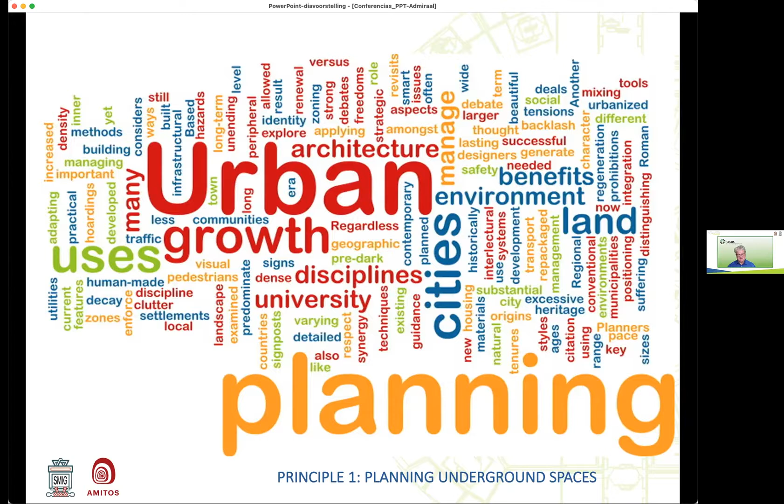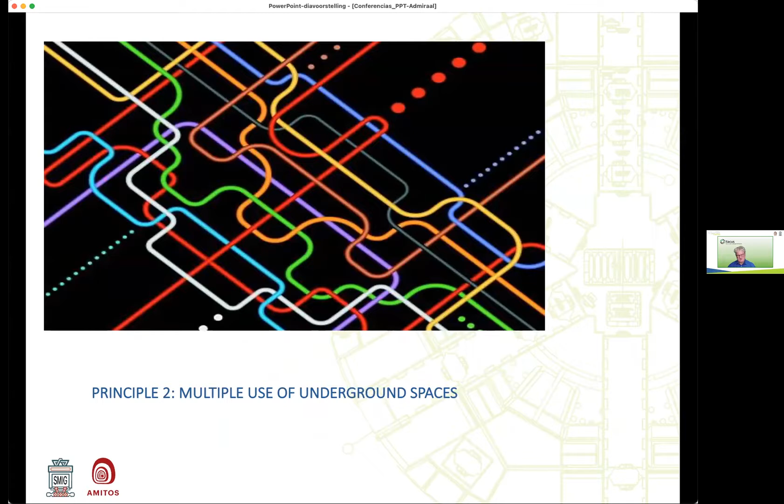I will go into this key principle a bit more in my presentation, and hope you will understand why we think this is a key principle, and something that is very necessary and needs to happen. The other principle is the multiple use of underground spaces. Again, something we will look into as we go through the presentation. A key principle: we have to stop using the underground for just one purpose. We have to start looking at how we can use our spaces for multiple purposes.

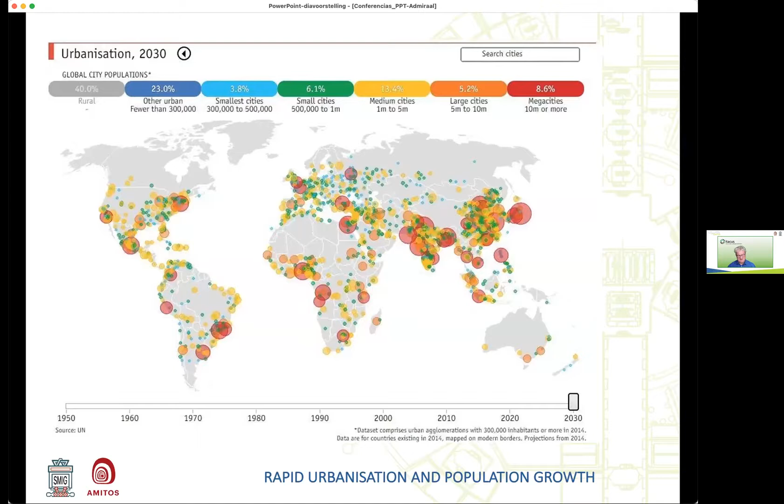But to begin with, let's look at the challenges that cities face nowadays. I don't think this map is a surprise to you all. It's a map that shows the rapid urbanization and the population growth that we have to cope with on our planet. These are the predictions for 2030, which is only 8 years away. Apart from the fact that about 60% of the world population will be living in cities by then, we can also see that 8.6% are predicted to be living in megacities, which are basically cities that house 10 million people or more inside their city limits.

Of course, another big challenge is climate change. I think we are all aware that the climate is changing. A lot of people are not quite aware of these questions of 1.5 degrees, 2 degrees. There's even a reference from the World Bank, which has determined that there's no certainty that humans could adapt to a 4-degree world. I always try to see these figures in relation to my own body temperature. I'm fine at the moment, but raise my body temperature by 2 degrees and I wouldn't be feeling all that fine. If I raise it by 4 degrees, I would feel very poorly indeed. And this is what we're looking at.

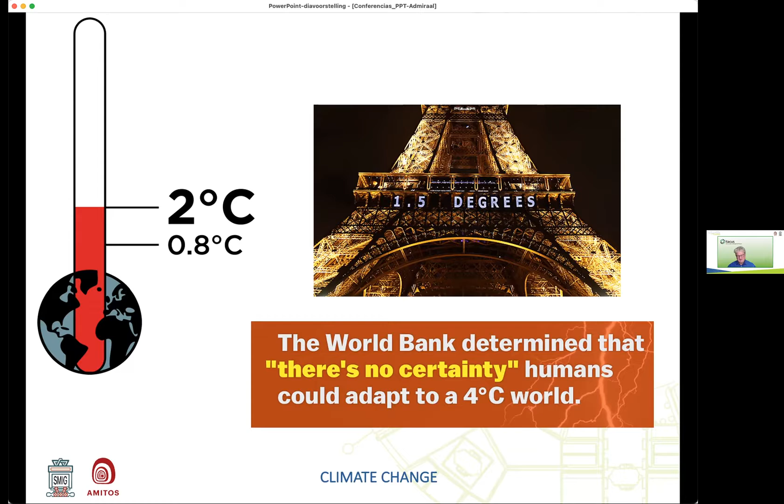This week, a report by the UN climate panel came out, which basically said we really have to start acting now. It's no longer time for discussions or research. We have to start acting now. Otherwise, we will move towards disastrous times. And of course, I think subsurface underground spaces have a large role to play in climate change as well.

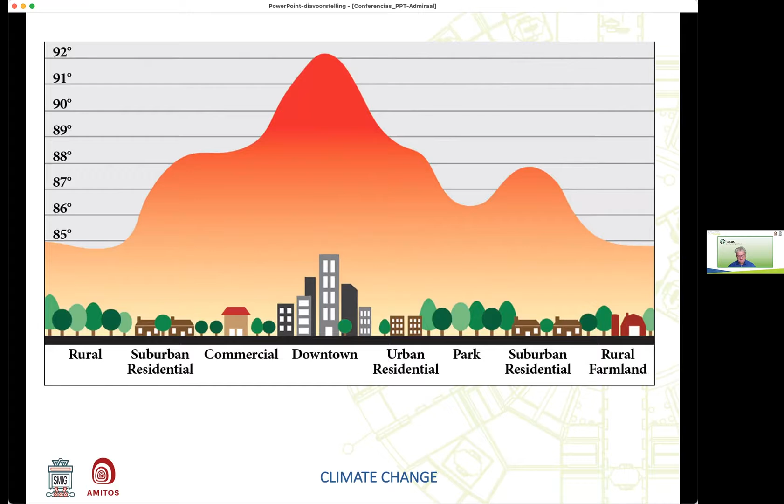We see an increase in climate-related disasters. We see an increase in floods, in storms, droughts, and of course, extreme temperatures. And especially the extreme temperatures are happening in places where they weren't expected, or they weren't taking place in the past, which basically means that a lot of cities are just not prepared for these temperatures, have not been designed to cope with these temperatures.

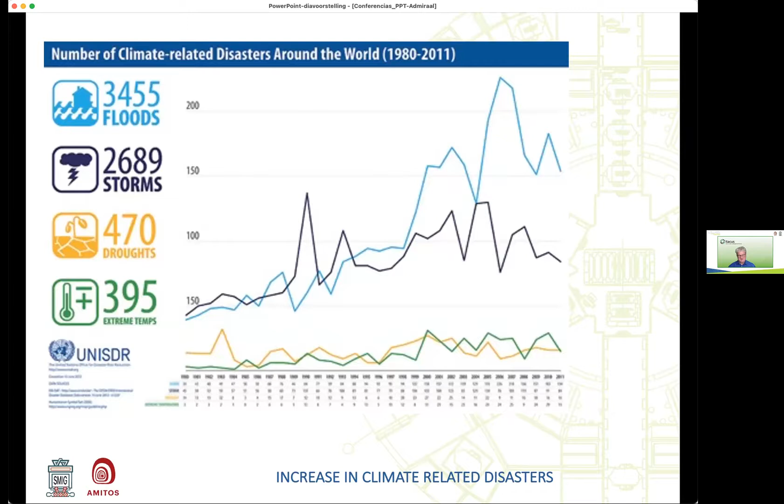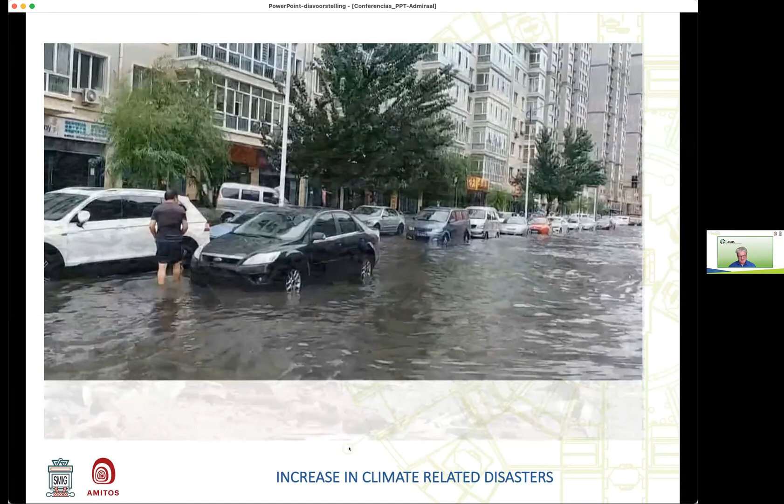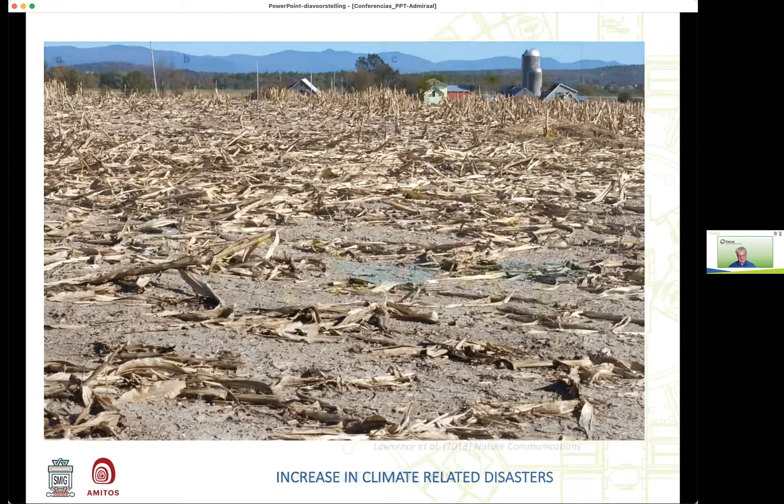The same holds true for drought, which is at the other end of the scale, where we have too little water. That is impacting crops and is leading to food shortages, as it impacts the total food supply chain. So climate change is not just about water, it is also about droughts. So we need to do something about this. We need to talk about climate mitigation.

And here you see a diagram from a recent paper in Nature Communications, which shows some of the strategies that are being looked at. Now, the strategy on the right-hand side of the diagram is called RFG. It's known as radiative forcing geoengineering, which is basically where we try to come up with technical solutions to kind of play down the effects that the sun's rays have on the raising of the temperatures on Earth. It's not something that I think underground space can help with.

But the two other solutions are a lot more interesting, where we talk about, for example, CCU, carbon capture and use, where we see the reuse of carbon, or CCS, where we have carbon capture and storage. And there's of course a combination of these where we actually capture the carbon emissions, we store them below the surface, and then we reuse them as part of the production processes.

We also have CDR, which is basically carbon dioxide removal, where we either have the strategy of reducing the carbon dioxide emissions by not using fossil fuels anymore, but also by storing them again or capturing them indeed. If you look at number 7 in the diagram, you'll see these units that are actually capturing directly. It's called direct air CO2 capture and storage, which goes with the abbreviation of DACCS.

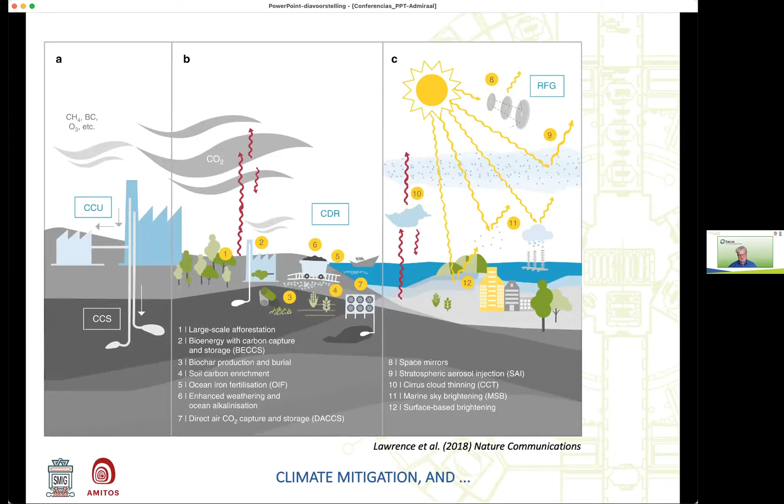But there's also agreement around the world that we need to look at climate adaptation at the same time. For a long time we thought that we could, through mitigation, delay the effects of climate change. We're now realizing that although we still need to do this mitigation, the effects of climate change are already here, and they're asking for schemes where we start to adapt to the fact that the climate is changing.

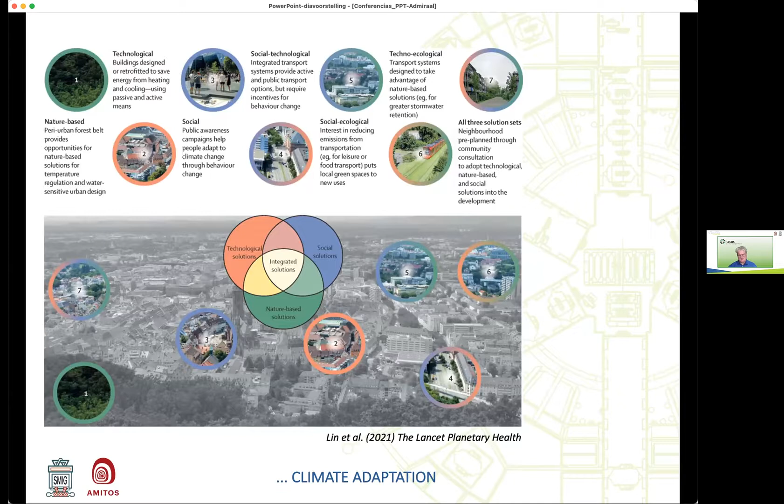And these call for technological solutions, they call for social solutions, they call for nature-based solutions, but overall they call for integrated solutions. And I think this is again of interest to us when we talk about the use of the subsurface, when we talk about creating underground spaces. We need to start looking at multiple use. We need to start looking at integrated solutions as well for that.

So those are the challenges that cities worldwide are facing. But we also need to look at the opportunities. What are the pathways forward, I've called them. And I think this is where we can start looking at how can we actually use the underground space. What are the pathways forward? And the first is what I would call audacity. We need to have the audacity to use our human ingenuity, and we need to start adapting.

And this is an example of the use of underground space, which goes back to thousands of years before the Common Era, where already in China, in certain areas, the yaodongs were created. And what are yaodongs? Well, basically, they are dwellings below the surface, and these dwellings have been built by humans who were adapting to the environment, who were adapting to the climate. And they started looking below the surface for protection from the climate. And they did it in a very interesting way.

They did it by basically creating these atriums. As you can see, the atriums are still open to the sky, to the outside environment, but they then lead to chambers that have been built into the rock. They go sideways into the rock to create additional spaces. And I always like to point out in this image that there are trees planted at the surface, but there are also trees planted in the courtyards that have been created. And this is a detail which we'll come back to later, which is, I think, very important. So keep the tree in mind. We'll come back to the tree later.

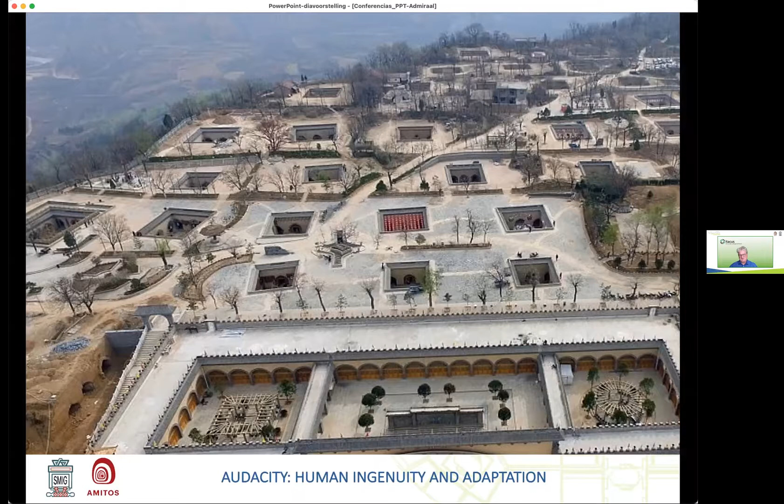But the point I'm trying to make here is that these kind of dwellings have been built for a long time, but they are basically the basis on which we design our underground facilities nowadays as well. And just to give you an example of that, we have the underground school extension that was built in Arnhem in the Netherlands. I won't go into too much why that was built, but basically the school needed to be extended. The original school was built by a renowned architect, and no other architect wanted to build something next to it that would compete with the original design.

That was one reason. And the other one was that the whole area where they wanted to develop this is an area of outstanding natural beauty that had to be protected. So they weren't allowing any surface buildings to be developed in that area anymore. So there were two reasons to go underground. And here you can see the inside of the facility. It's a school for music and dance. The classrooms are built into the side, as it were. You can see the rooftop, which allows daylight to enter, and you can see the steel structures that have been incorporated, and they are there to withstand the soil and water pressure of the underground facility, as it's built in an area with a very high water table.

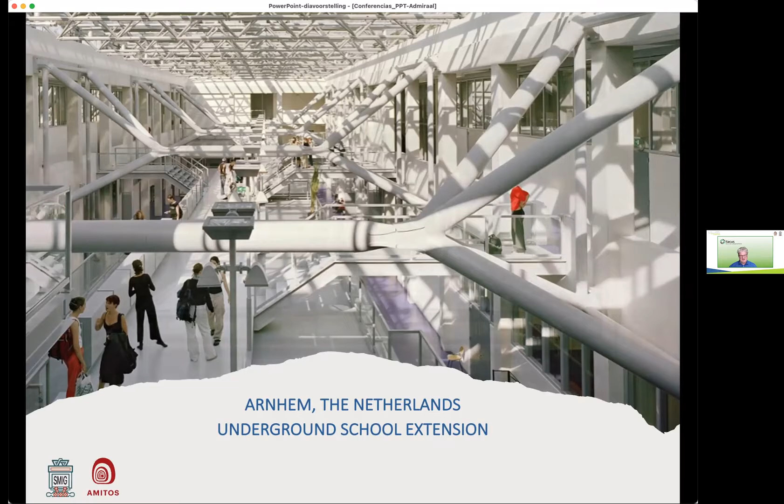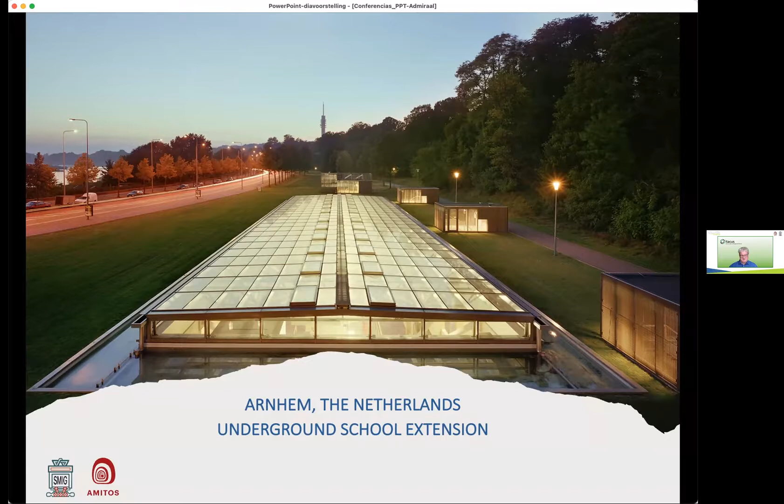And this is how it looks at the surface. You can see that what is actually the roof when you're on the inside is at grade. It's a skylight that you can see, but most people don't notice it when they pass by. But it's an elongated yaodong. It's the same principle as the yaodongs that we saw before.

And if you want to take this whole idea a little bit further, then you come to a project that was proposed by Dominique Perrault, French architect, in Seoul in South Korea. He calls it the light walk. The light walk creates at the surface a very interesting feature in this whole green area, this green public space that we find inside the city.

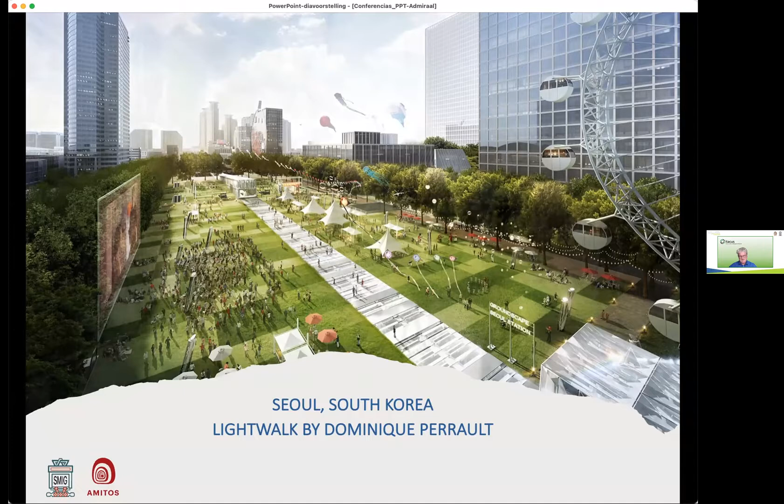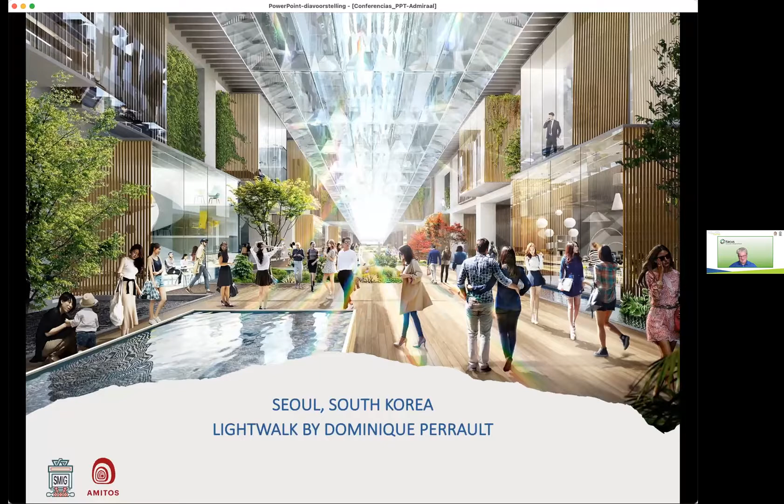We have daylight entering from the surface through the glass canopy that has been placed there. And you can actually see people walking at the surface using the light walk as you walk below. And what it does is it actually adds extra space to the city. It adds something to it; it's a new tissue that is being added to the existing urban tissue.

But we can go further than that. We can actually also create our own caverns. The caverns is typical for humans seeking shelter. It's been something that's been done since the advent of humans. Basically, they went for shelter inside mountains. We are now at a point where we have the technology to create spaces inside these mountains. We can excavate them. We can take out the material. That material can be reused as a building material, and we're left with a space that can be used in multiple ways.

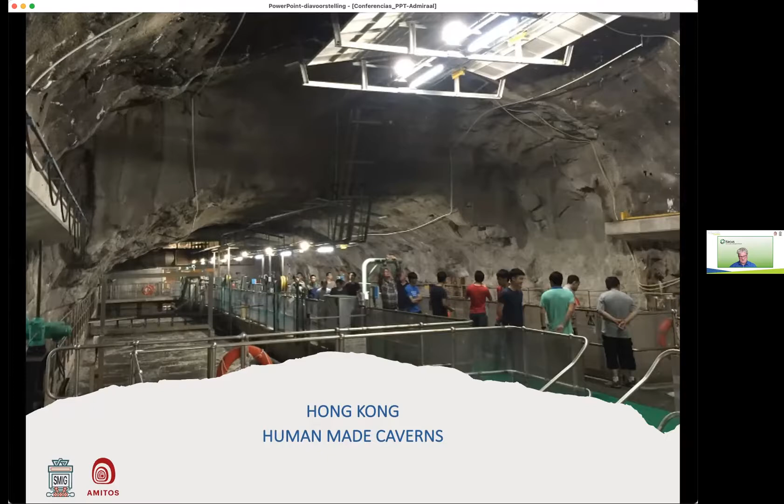And indeed, in Singapore and also in Hong Kong, they are looking into ways of reusing these caverns. Here, for example, a wastewater treatment facility has been placed into this space. And I think what is interesting here is that you have created a space that is now being used for a wastewater treatment facility, but it could be used for any other use at the same time. This was done to free up surface space, so that at the surface we create new areas where they can develop for housing by placing the wastewater treatment facilities that up to now were at the surface below the surface. So the opportunities are unlimited in this sense.

As we saw an example, you can use it for education facilities. You can think about cultural facilities. Museums are obviously facilities that would have advantages when placed below the surface. If you think about it, a lot of the museums that display art or old paintings don't even want sunlight to enter their exhibition spaces because the sunlight could actually damage the painting. So they don't even need daylight to exist. And indeed, if you look at the underground expansion of the Louvre in Paris as a good example, you'll understand what this means.

At the same time, we have transport and transportation hubs. You could start combining these things. You could combine culture, education, transport hubs, shopping malls into underground facilities. Industrial facilities are possible as well. I already mentioned the wastewater treatment facilities and geo-resources. And of course, the geo-resources is where we hit on what I talked a little bit about earlier: the fact that we can use the subsurface for energy purposes. We can use the subsurface for storing CO2. We can use the subsurface for extracting materials.

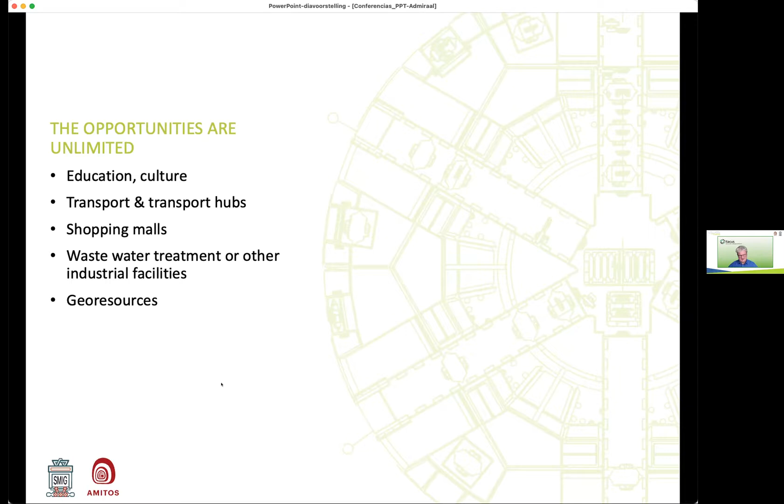But then we have to decide on how all these uses will come together, and that is what we will be looking at in a minute. Because planning, as I said earlier, is essential. It's what I would call key principle number one. And why is this important? Well, basically, we want to avoid what I would call urban confusion. So we need urban planning to determine what uses are placed where in the subsurface. It's about locality, but also about temporality, as we will see later on.

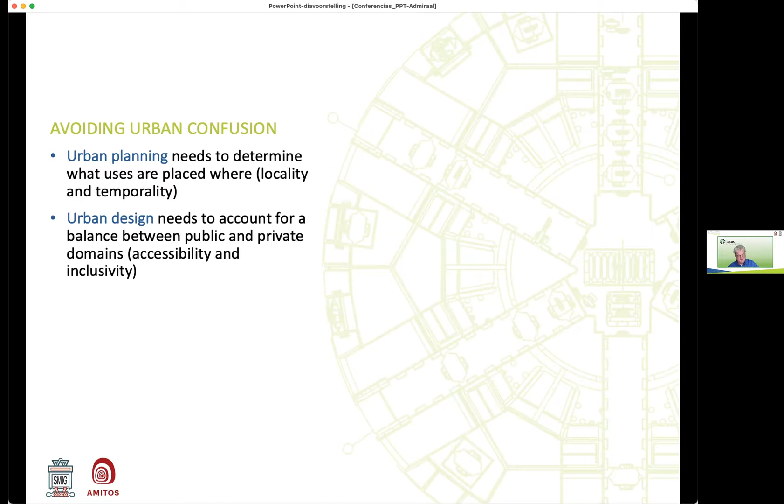Time plays a role as well when we're using the subsurface, and we need to think about what that means when you come to determine whether or not you're going to use the subsurface over a period of the next maybe 100 years. Urban design needs to account for a balance between the public and the private domains. We need to think about accessibility, and we need to think about inclusivity. And we'll go into these things now.

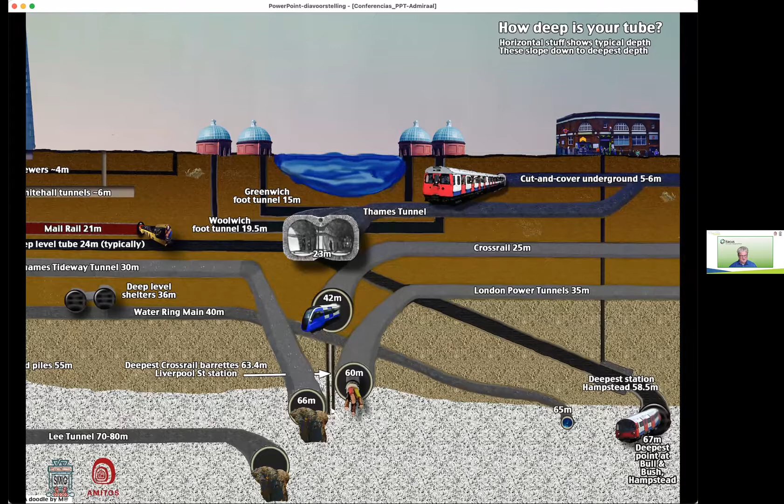We have sewers and the Whitehall tunnels at 4 and 6 meters depth. As we go through time, you can see that things are being placed deeper and deeper below the surface. The deepest station is Hampstead at 58.5 meters below the surface. But the new Crossrail, for example, is at 25 meters depth, but sometimes has to go to 42 meters to go under already existing networks.

labyrinths, or as a French architect coined them, he talked about the mangroves that were, as it were, below the surface. The mangroves, you can see nice greens above the surface, but the whole root structure that then extends below the surface actually determines the mangroves, and in this case all the underground roots, if you like, determine the city, because the city couldn't function without these underground facilities and underground networks.

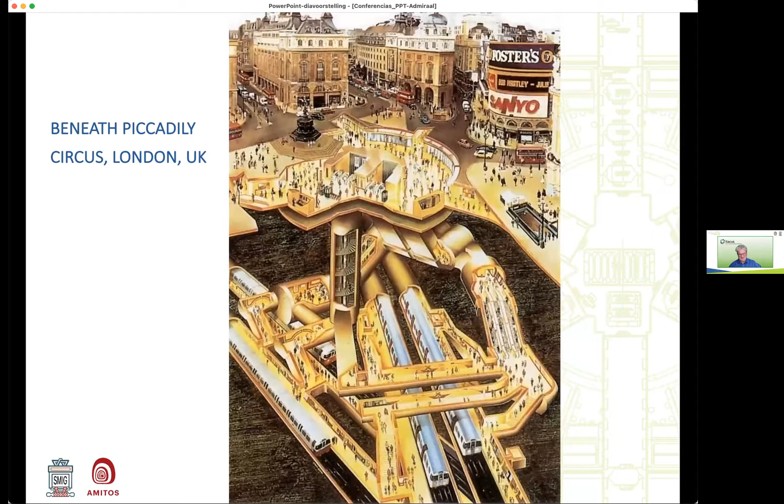At the same time, we need to avoid creating what I would call the urban service layer. We need to appreciate that the subsurface does not serve the city. It is not there to just place everything we don't want at the surface below the surface. The subsurface is an integral part of the city. It provides support to the city in the sense that it makes life in the city possible.

So its development should aim at integrating the new tissue that we are creating below the surface into the existing urban fabric. We should stop with creating these single purpose spaces that only connect through a staircase to the surface. We need to start thinking bigger in that sense. So we need to move from creating an urban service layer towards an underground urbanism.

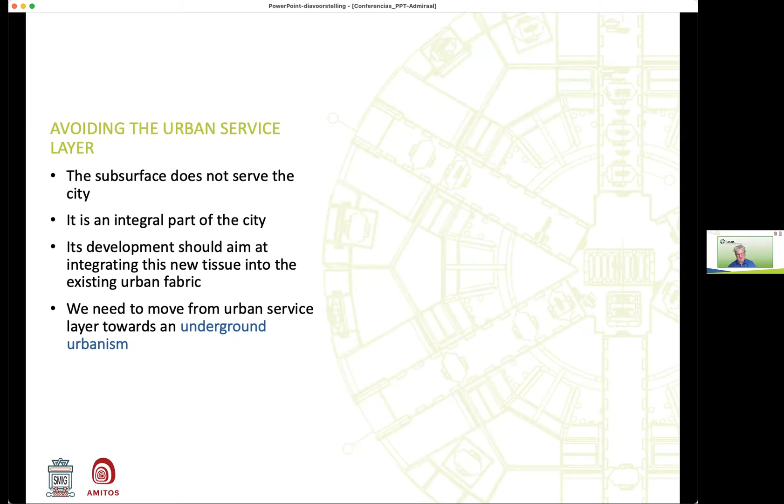We need to look at an underground urbanism, and this is indeed what the ITA Committee on Underground Space is doing together with ISOCARP, the International Society of City and Regional Planners. We are looking at ways on how we can develop an underground urbanism, what this is, and how that then ties in with urban planning and urban design.

This whole concept of public domain and private domain is an interesting one as well. Here you see a schematic of the Canary Wharf underground station in London, where you have two canopies appearing above the surface. You enter them, you go down towards the ticket hall, and even further down to the two round circles that represent the two tunnels where the London Underground is going through.

Essential in this is that the limits of public domain are defined by where people go into this whole underground facility and where they then come across a ticket barrier, and they need a ticket. They need to buy a ticket to go through the ticket barrier before they can use the transport system. But where you place the ticket barrier also then determines where there is still public domain and where the private

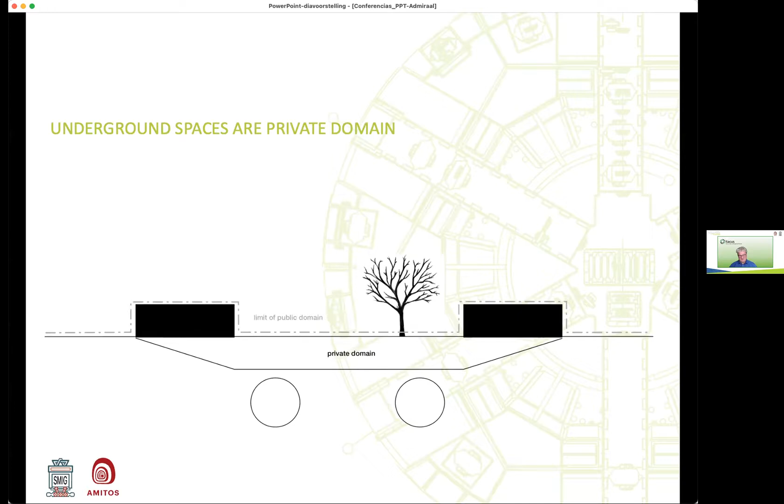domain starts. So when we design these underground systems, we think it is pretty normal that people buy a ticket. We think it's pretty normal that we close them down when there are no more metros running through the system. But by doing so, we actually kind of separate these domains from the public domain. So they're not part of the city. They're only there at the time they can be used. And this is something we need to be very careful about when it comes to designing our underground facility.

So here, the Canary Wharf station, as you go in, you go down the escalator. At the bottom of the escalator, you can't go further if you don't have a ticket. So it is a very functional part of the city, but it doesn't add in that sense to the city.

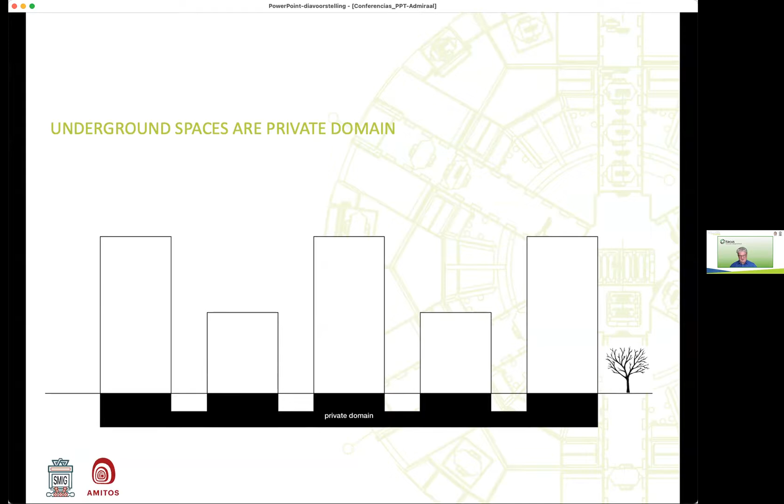The point is, you can only access large parts of these systems during office hours. You can only access large parts of this system during the operational hours of the underground system. So again, they are not open to everyone. They are not open 24 hours a day. They are part of the offices above, and as such they are limited. So here you have this clash between public domain and private domain, and also in terms of who is actually responsible for those people inside that private domain.

Is it the owners of the offices? Is it the owners of the hotels? Or does the city itself still have a role to play there, even if it's a private domain? So can you actually do this differently? And the answer to that is yes.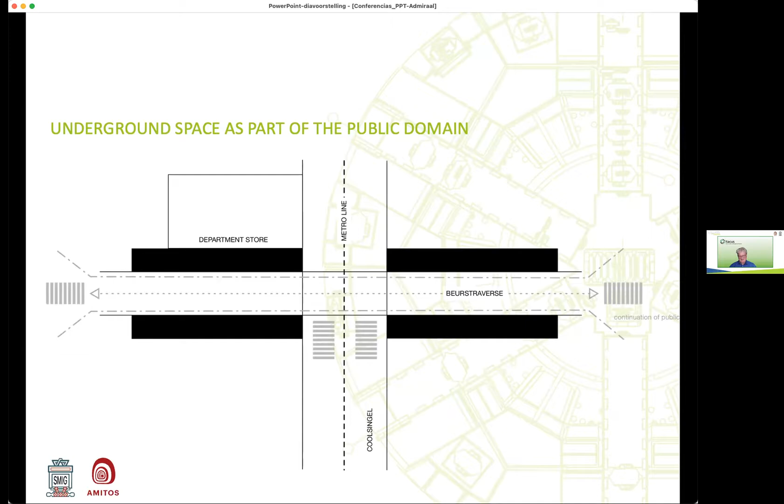Here we have an example of the Beurstraverse in Rotterdam, which is basically a sunken shopping street. It runs under the main road through the city, the Coolsingel, which is a major artery. There's also an underground metro line running beneath it. There's a station there. There are department stores there. But essentially, what has been done there is that the public domain has been continued into the underground.

And how was that done? Well, that was basically by sinking, as I said, the street to the -1 level, and then opening up shopping spaces there, or connections into the department stores on either side. You could go to the metro station and you can walk down and follow the street right to the other side, passing under the major roadway.

And there are some important features there. There are water features there where children can play during summer, but they can do this independently of the shop opening hours, independently of the operating hours of the metro system. So you can, at any time of day, any day of the year, walk along this underground street.

And most importantly, I told you that we would come back to the trees. Note that the trees have been placed there. Note that the trees are there because they give people the idea that they're still walking at the surface, even though they're walking a couple of meters below the surface. So here you can see how you can actually try to integrate your development into the public domain and make it remain in the public domain.

So again, key principle 1, planning is essential. Planning and design of urban underground spaces is required to prevent a self-replicating network coming into existence that is privately owned and operated, because that will always limit the use in terms of what we would really like to see inside the city. And what we really want to see inside the city is public spaces.

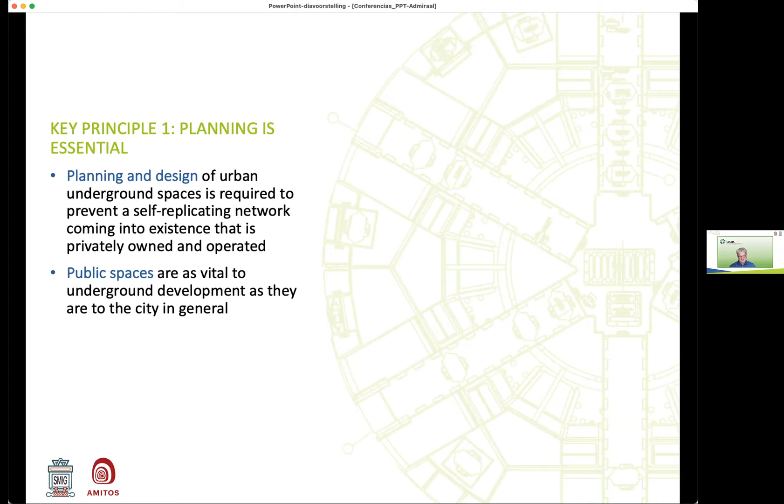Public spaces are as vital to underground development as they are to the city in general. So when it comes to thinking about creating underground spaces, we really need to think about how we can avoid all these spaces turning into privately owned spaces, and then also single purpose spaces. Which then brings me to key principle number 2, which is that multiple use is essential.

If there's one thing that I want you to take away from my presentation, it is that we need to stop wasting underground space. That might seem strange from the point of view that I'm an advocate of using underground space, but I'm also an advocate of using underground space in the right way. So we need to stop building single-use infrastructures or facilities.

We need to look at how we can combine uses in such a way that space is used in a multiple way. We need to start integrating uses in such a way that waste is reused. And we need to start creating spaces that can be repurposed in multiple ways over time.

And just to give you a quick example of single-use infrastructures, if we create a metro line, what does that metro line do? It only serves to move people from one station to the other, and that's all it does. And it also only does that during a certain part of the day. So part of the 24 hours of operations, it will be not doing anything, and it will just move people.

At the same time, we have enormous problems with logistics in our cities. We have problems with bringing food into the city. We have problems with bringing all other kinds of things into our cities. So why is it a strange idea to look at if we can develop these metro lines in a different way, and maybe use them also as underground logistical systems when we don't need to transport people?

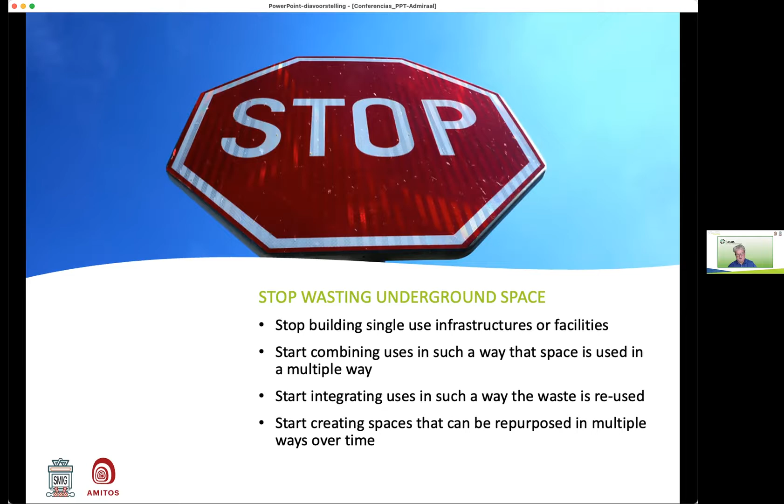So one interesting way of dealing with this is to create these underground facilities where you can store enormous amounts of water in an attempt to actually prevent the rivers from bursting their banks. And then once the rain has subsided and the levels have receded, you can then take the water out of this storage facility again.

In building this, they've created an interesting temple, but it only does one thing: it stores water. Yes, you can have people walking through it. Maybe it's interesting for tourists to visit. Maybe you can even use it for a James Bond movie or something. But at the end of the day, it only does one thing: it stores that water.

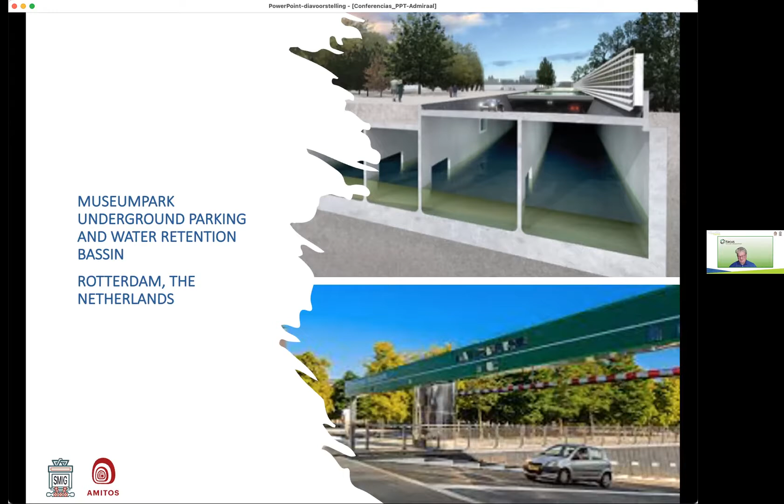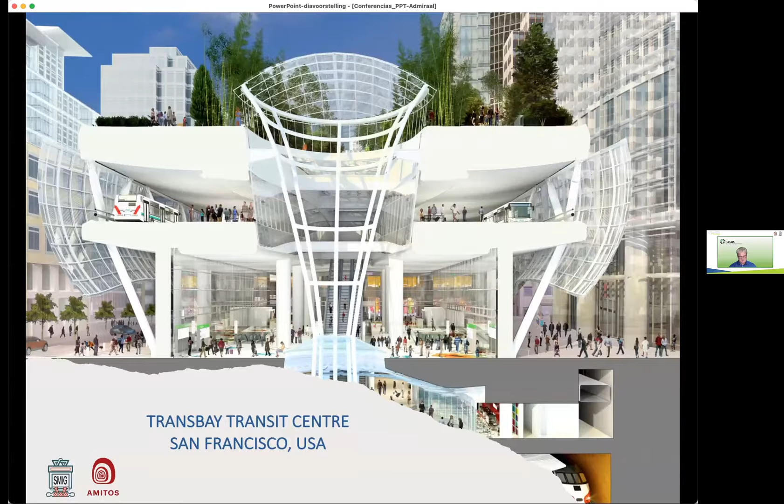Another nice example of how we can integrate the use of the subsurface and above the surface is the Transbay Transit Center in San Francisco. Here again a schematic, but this is not only showing how we integrate the subsurface and the surface, but it also shows you how we can actually bring sustainability into the whole operation.

So if you start at the lowest level, you can see an underground rail line running there. You have the intermediate platform level, and then as we move from the surface up into the building, you can see where passengers can go to the bus platform, and above that we even have a new park. It's basically an elevated park on top of the facility, but that even serves a purpose because we want to capture the rainwater. We want to hold on to the rainwater and reuse that rainwater in the facility.

At the same time, you see that the air can travel from the lowest levels to the highest levels, providing a natural means of ventilation. You can see the trees that have been planted there that take the CO2 out of the air, but they also provide shade and cool in a city where there's just a lot of buildings and not a lot of green spaces. So this one facility, because it has been developed as an integrated facility, not just makes use of the underground space, it adds enormous value to the city in its presence and with its rooftop park.

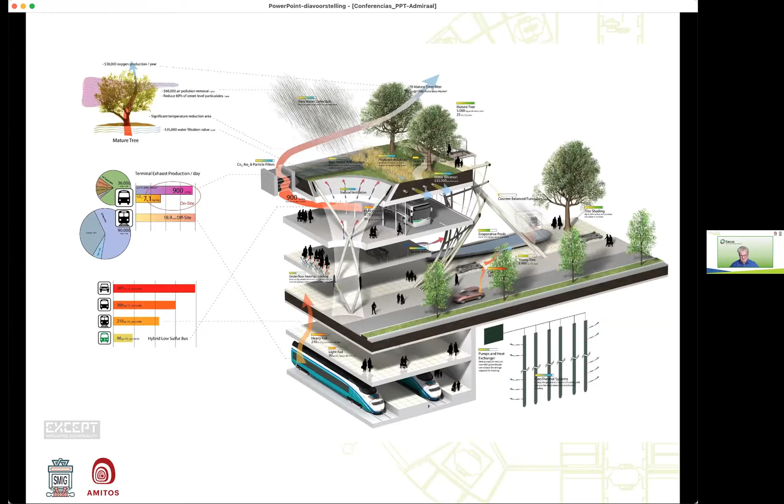But then if you look at the right-hand side of the picture, you can see these vertical pipes running into the ground. They are pumps and heat exchangers. They are actually utilizing the subsurface for storing hot water, for taking out cold water, so you can cool the building during the summer, and you can use the hot water to heat it during the winter. So this is a totally sustainable development, which is utilizing the subsurface for many different uses.

We can take that even further. Here you have an example of a cavern in Sweden where they've placed a data center inside the cavern. And as we all know, these data centers produce a lot of heat. They require cooling. And what better use if you can actually reuse the residual heat that is being produced by these data centers.

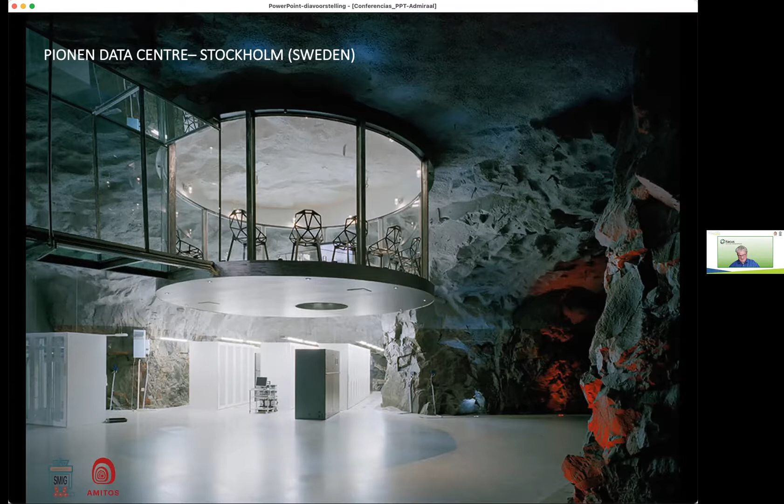In Finland, there's an example where they take water in from the sea to cool the servers, and then that water is heated by the servers and goes straight into the district heating system, and it helps to heat houses. And this scheme in 2017 already led to a couple of Swedish cities starting an open innovation competition. They said they were looking for creative partners with innovative solutions that can be involved in a new venture to convert waste heat into urban food or other biological production.

Clean residual heat emitted from a diverse range of sources, from single refrigerators to industrial sites, represents a waste of both energy and resources that is ultimately detrimental to the local and global environment. They wanted to see how we can actually reuse this heat to heat homes and offices, but also to make things grow. And that is where we can start taking use of the subsurface to a totally new level that we've never thought of before.

We can start thinking about, can we actually create underground farms? Can we create farms beneath buildings that start providing food to the city where the food is needed? It doesn't need to be flown in from faraway places. It doesn't need to be taken in from rural areas, which all has a very big CO2 footprint. If you can produce greens inside the city and deliver them straight to where they are required, that has an enormous impact on the footprint.

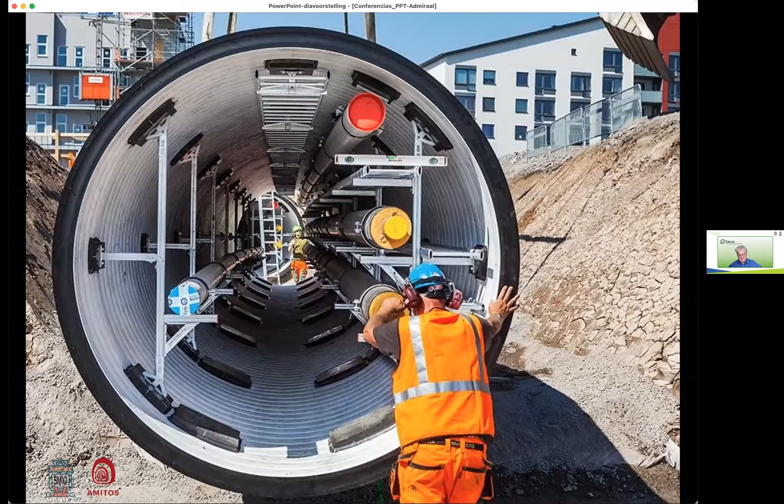Another interesting example also from Sweden is the infra tunnel. If you look at it, it just looks like any sewer that you might find placed below the surface of a city. But this is actually the inside of what looks like a sewer on the outside. It is what they call an infra tunnel. It is a space they create below the surface. They do it just once. Once it's there, it can be used to place all the cables and pipes that a more modern urban development requires. But it's large enough for somebody to walk through it for maintenance. They can put in new cables or pipes as they are required, and it doesn't require opening up the city anymore.

Once it's there, the city can plant trees on top. It can do all kinds of things, and the streets can be maintained. They don't need to be opened again for new infrastructure, because they've created this whole flexible space below the surface that can be used for a variety of purposes over time. And I think that is the way we need to move forward. We need to start thinking about these types of uses below the surface. So we want to create space below the surface, and how we fill in that space over time is something we need to be flexible in.

And this is, of course, something that keeps architects busy as well. This is an example from Los Angeles, where architects have been thinking about how we can transform parking garages of today into the housing of tomorrow. One of the developments we are seeing is the whole advent of autonomous cars and a different car ownership, where people are no longer buying their own cars. They just have an app on their phone, call for a car to come to their house when they require it, take it to where they want to go and then leave it there, which is a totally different system than we have now.

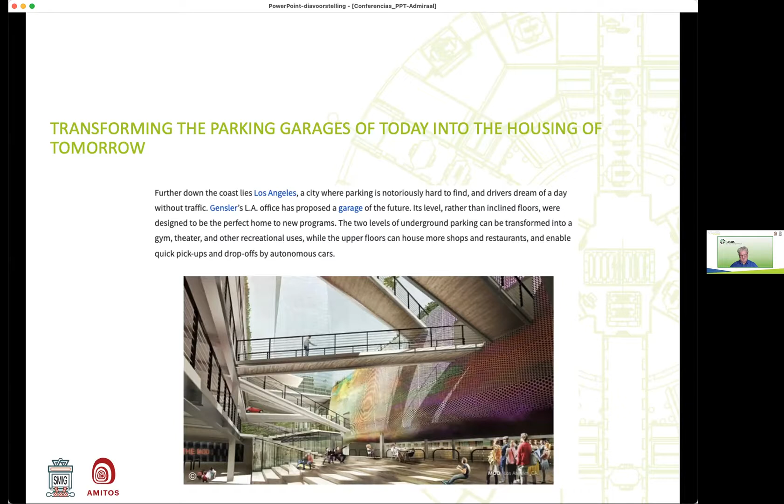We have to think about, when we create underground spaces, we're not creating a tunnel for a metro to go through. We are creating an underground space that has a lot of additional uses, but also its use will change over time. That structure that we create below the surface, just like as we saw with the Yaodongs, is going to be there for a long time. It's going to be there for hundreds of years, and it's going to have different uses over time. And that is what we need to think about when we start designing these spaces.

Which brings me to my concluding remarks in terms of the challenges and opportunities for underground space. I mentioned to you already, there are two key principles. The first, we require underground space planning. And again, I remind you of that image that I gave you of the city below the city in London, where you saw all these networks running in the horizontal plane. If we talk about carbon capture, if we talk about energy uses in the subsurface, think about geothermal energy, for example, they all require wells that are running in the vertical plane. So where are these things going to meet up? How are we going to place them?

I think there's a lot of cities worldwide that are extensively using their underground spaces for networks that will have a very difficult time in being able to create wells that go down 2 or 3 kilometers for geothermal energy purposes. If we don't think about these things now, then we're going to have underground chaos, and we're going to have things running into each other.

That is why we need underground space planning, but we also need it because we want to add value to the city. We want to ensure that we're not just creating single purpose private domains. We want to make it part of the public domain. We want to make it part of the city, which also means we need to look at multiple and integrated uses of those spaces that we create.

Three key messages: business as usual no longer suffices. Stop doing things as you've been doing them for a long time. Start to think about how we need to start doing things differently. We need to think about climate mitigation and adaptation in our working practice, and how we can start integrating these things into our work practice. We need to mitigate and adapt, and underground space is a vital part of that process.

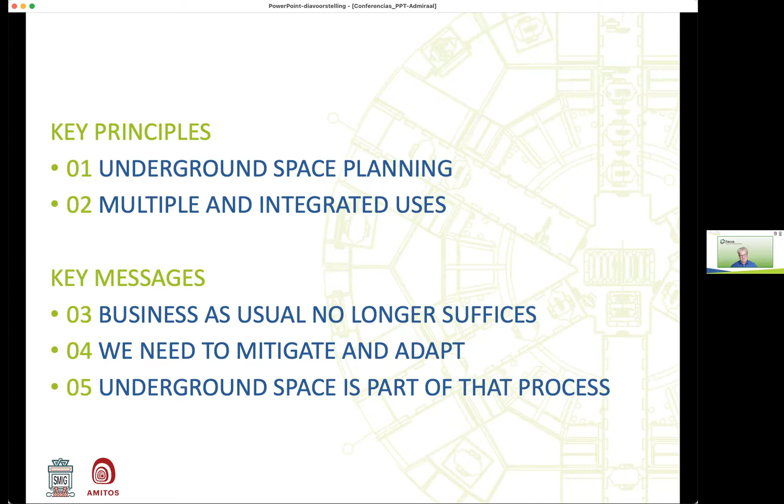It's my opinion that we're going to play a vital role when we talk about creating the cities of the future, where we try to mitigate climate change, we try to adapt to climate change, and we try to build resilient cities that are inclusive and that can be used by the people that live in those cities, because that was why we created cities in the first place.